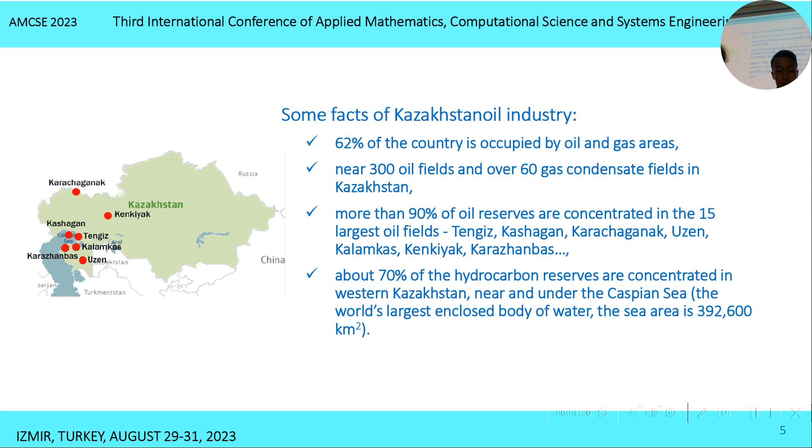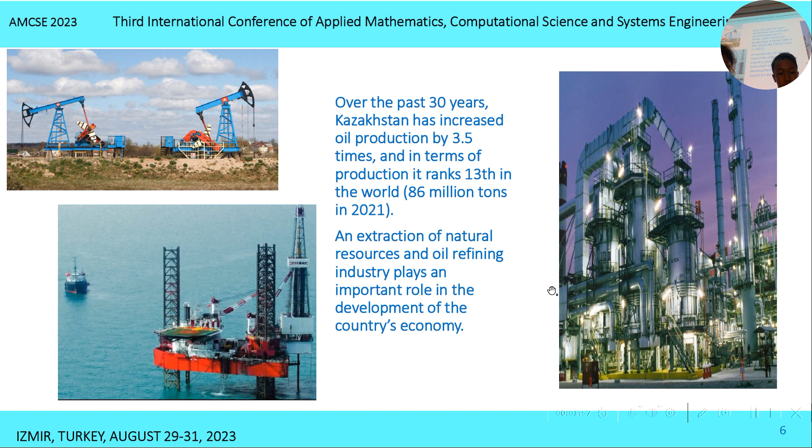The Republic of Kazakhstan is an oil and gas producing country located in Central Asia and partially in Eastern Europe. The main oil reserves are in 15 largest onshore oil fields, which are located in the western part of the country. The Kashagan offshore field in the Caspian Sea is the largest oil field outside of the Middle East. The oil and gas sector is the main driver of Kazakhstan's economy. Crude oil and gas export revenues account for half of the country's gross domestic product.

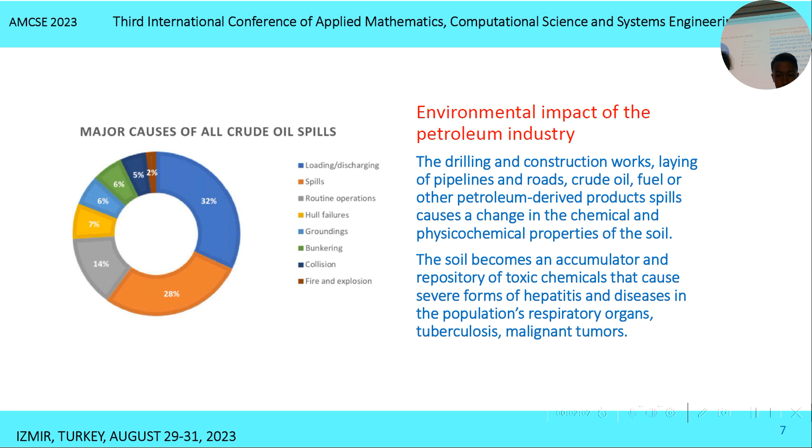Oil spills can contaminate soil, water, and air, and have destructive effects on ecosystems and human health. The Caspian region has a large set of environmental problems, and the ecological status of the territory of Western Kazakhstan is characterized as pre-crisis. New alternative, highly sensitive and low-cost tools are needed for fast and accurate identification of oil pollution using alternative technologies that can replace or supplement the remote sensing technique based on computer vision.

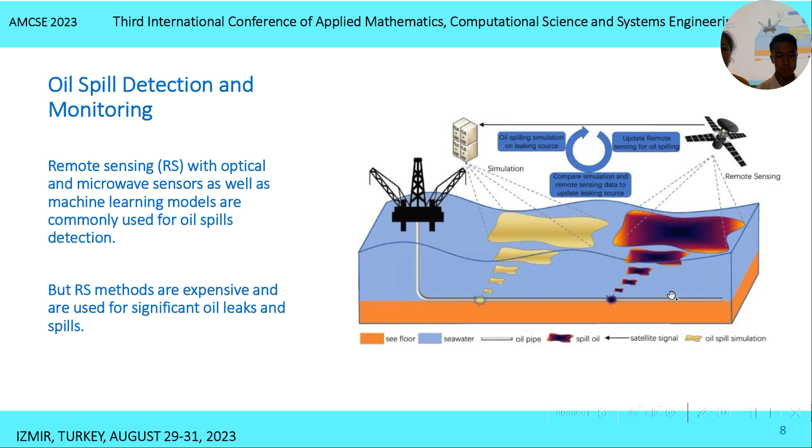The purpose of our study is to investigate possibilities of an electronic nose as a combination of a chemical sensor array with pattern recognition techniques to distinguish petroleum hydrocarbon soil pollutions.

Materials and methods. Crude oil from 3 Kazakhstan oil fields and 5 petroleum products from local producers were chosen as experimental samples. Petroleum products were selected whose spills actually occur during extraction, transportation, and when they are used for mechanized land cultivation in agriculture. Used motor oil was collected in a local garage. Used motor oil is an environmental pollutant containing significant concentrations of toxic compounds, including heavy metals. 6 soil types were selected to cover a wide range of commonly encountered soils in Kazakhstan.

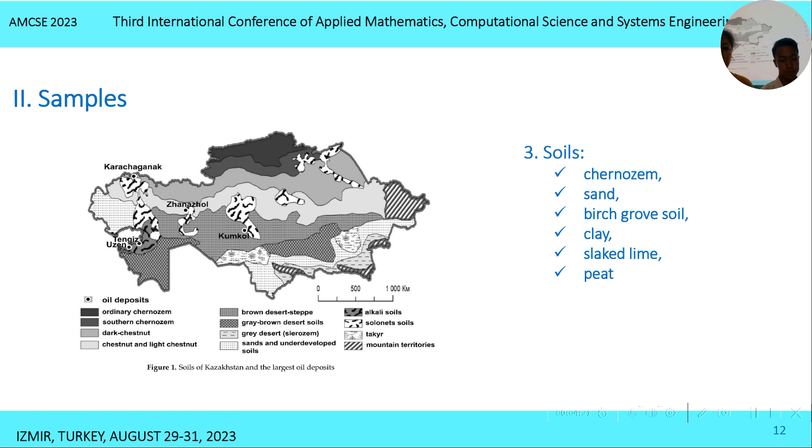An artificial olfaction system mimics the mammalian olfactory system. It can identify different complex odors by comparing the incoming odor with previously learned patterns. An electronic nose uses an array of gas sensors with differing relative sensitivities. The collective response of these sensors corresponds to the odor pattern like a fingerprint, allowing the identification and classification of our samples.

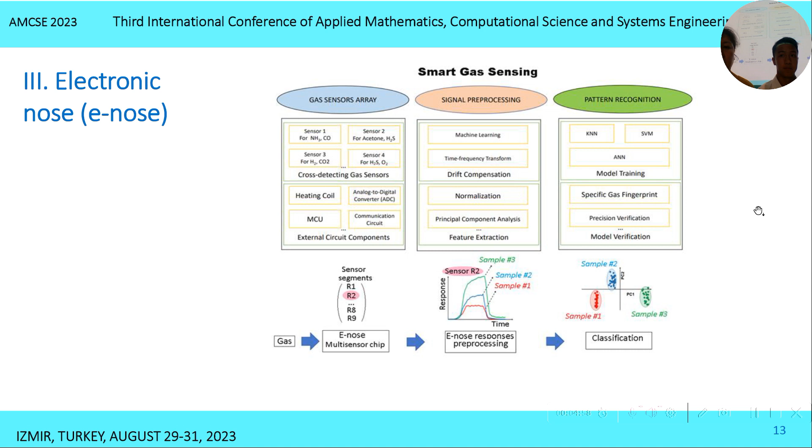We applied a homemade e-nose, which included an array of 8 metal oxide semiconductor sensors. Gas sensors and a temperature and humidity sensor were grouped on a separate board and connected via an analog switch to an analog-to-digital converter on the Arduino module. The sensor array and Arduino module were installed in a single metal housing to enable constant airflow supported by a ventilation fan. The e-nose was powered by means of a USB interface connected to a PC, also used for data acquisition.

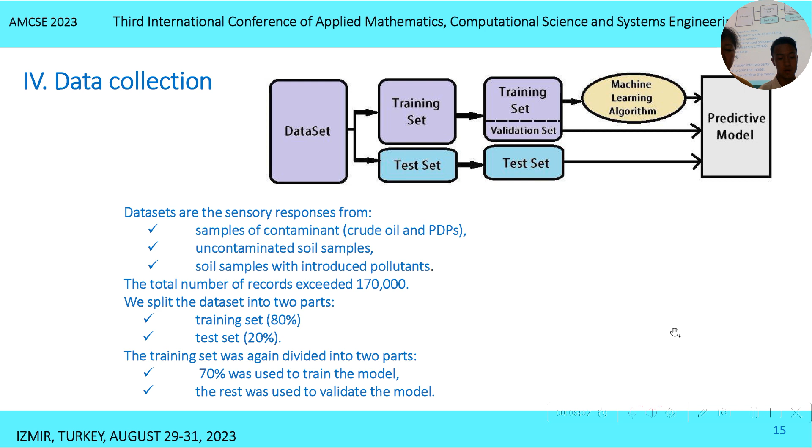Data sets were collected in sequential series of experiments measuring sensor response to volatile organic compounds from samples of uncontaminated soil and soil samples with introduced pollutions. To analyze and classify the sensor response, we applied principal component analysis and machine learning algorithms.

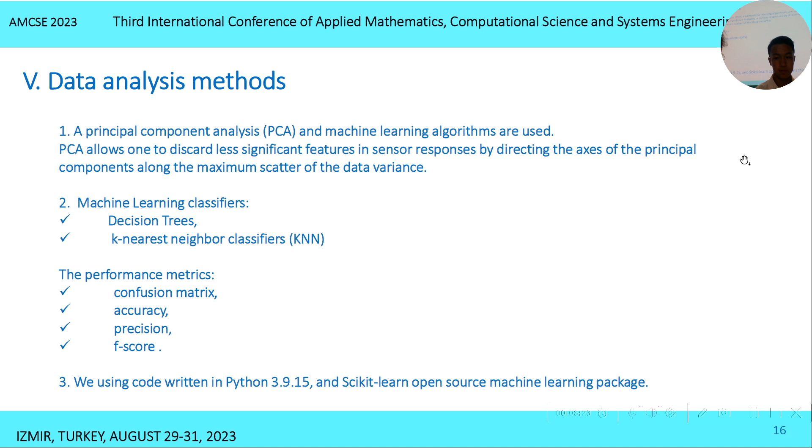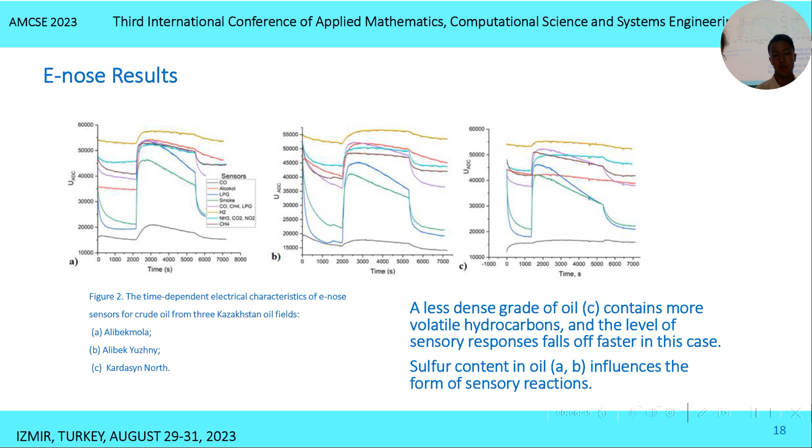Results: a less dense grade of oil contains more volatile hydrocarbons, and the level of sensor response falls off faster in this case. Sulfur content in oil influences the form of sensor reactions. Petroleum products are produced from different fractions of oil with different amounts of volatile hydrocarbons. The more volatile hydrocarbons, as in gasoline and kerosene, the higher the amplitude of sensor response.

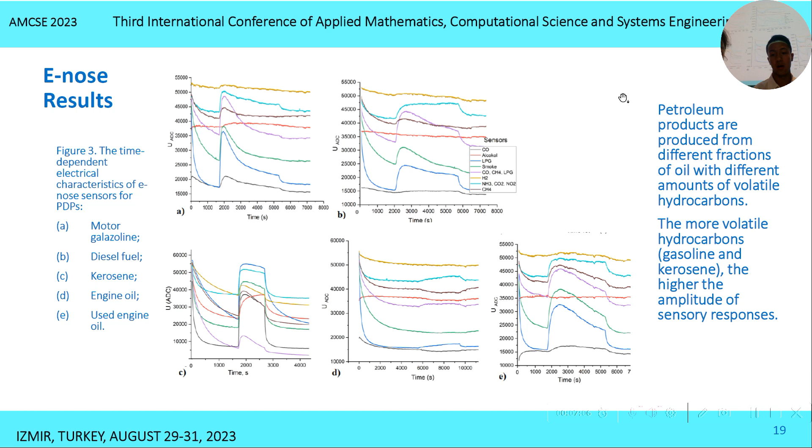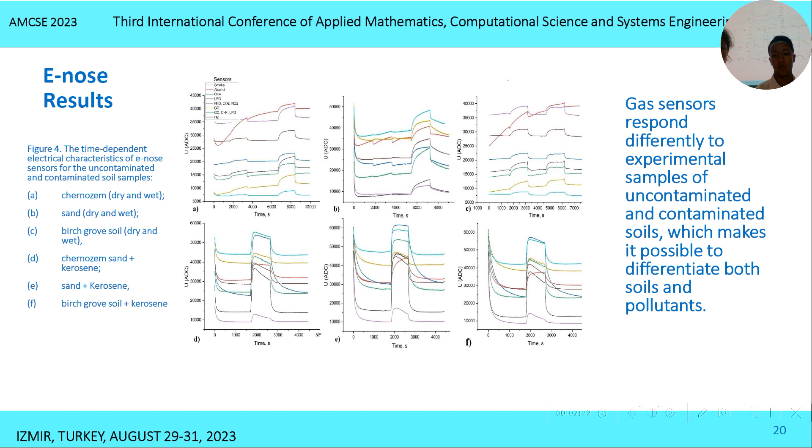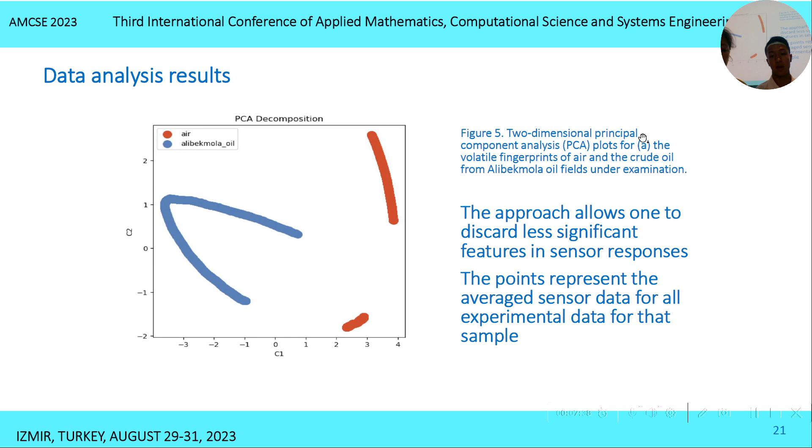Gas sensors respond differently to experimental samples of uncontaminated and contaminated soils, which makes it possible to differentiate both soils and pollutants. The approach allows one to discard less significant features in sensor response. Each point represents the average sensor data for all experimental data for that sample. Data analysis results.

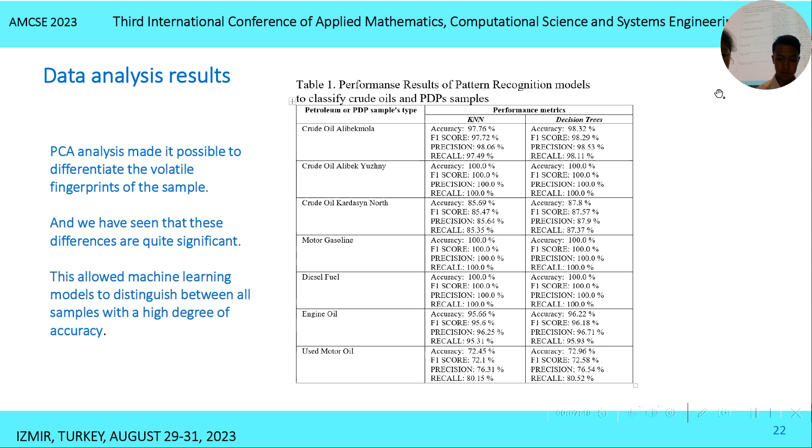Conclusion: we investigated artificially polluted soils to detect soil contamination and distinguish between some types of soils, oil and petroleum product pollutions using alternative sensor technologies that can replace or supplement computer vision and remote sensing techniques. Experimental results have shown that the e-nose system is able to identify not only the presence or absence of crude oil and petroleum products in soil samples, but it can differentiate the oil's brand and type of petroleum product. In future studies, we will determine the source and type of oil pollution in soil samples taken in oil production areas and other contaminated areas.